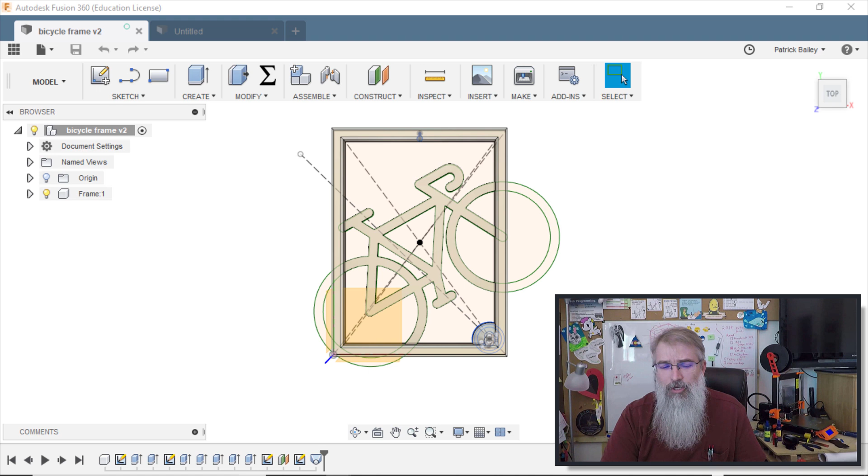So here is what I did with the bicycle. I'm not going to go too much in depth. I'm going to redesign it a little, and I'll probably post it on Thingiverse. But the flossing Fortnite dancer is probably a little more fun to do.

Here I'll go over the idea real quickly. I took the SVG file, imported it, turned it at an angle, and then built a frame around it, then extruded the whole thing. You can see where the bicycle happens to go over - I just didn't extrude that. And I extruded the bicycle just a little bit, though I don't know how well that shows up here.

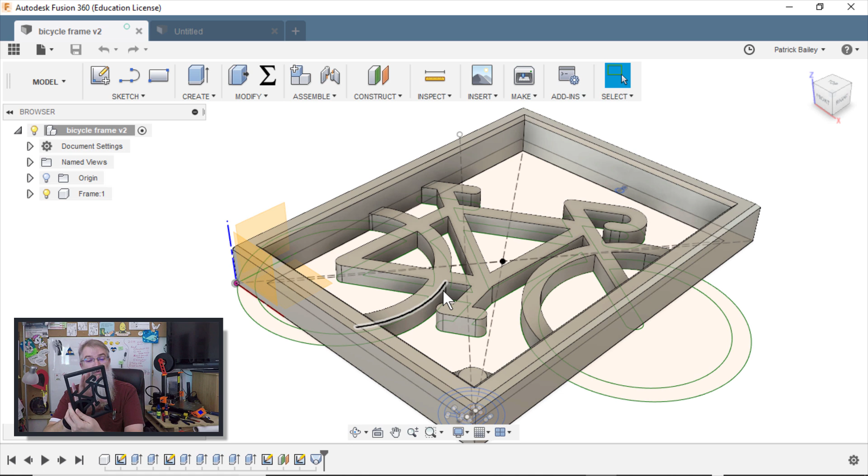I'll do a redesign of it, but it's a little snazzy. I'll probably put a few different versions out there, because maybe you want an empty one, or maybe you do want to fill that space, or fill it with different colors in the wheel or something. I've got some ideas.

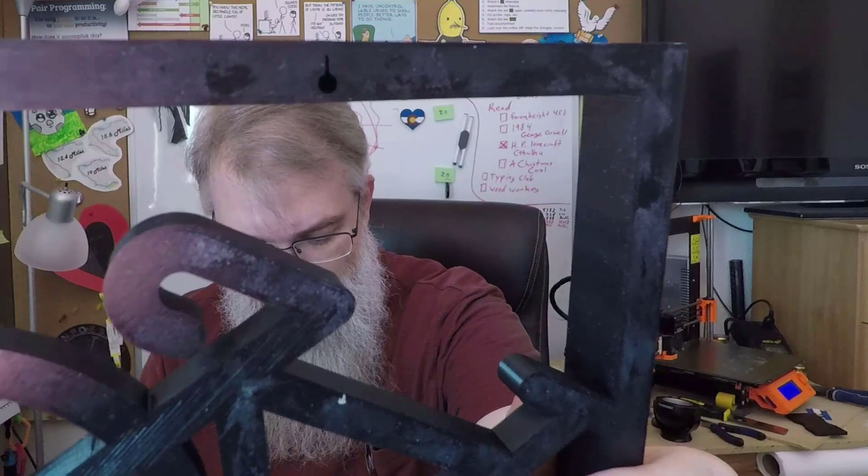But one thing that I didn't do too well on was the hanging. I don't know if it's going to show up well on the video, but I just put a little pinhole in there to put the nail on, and I don't think that's reality. So I've done a little redesign, and I've got this little sawtooth shape with a cavity in here that I did as a test. I'm going to try to do that in this video.

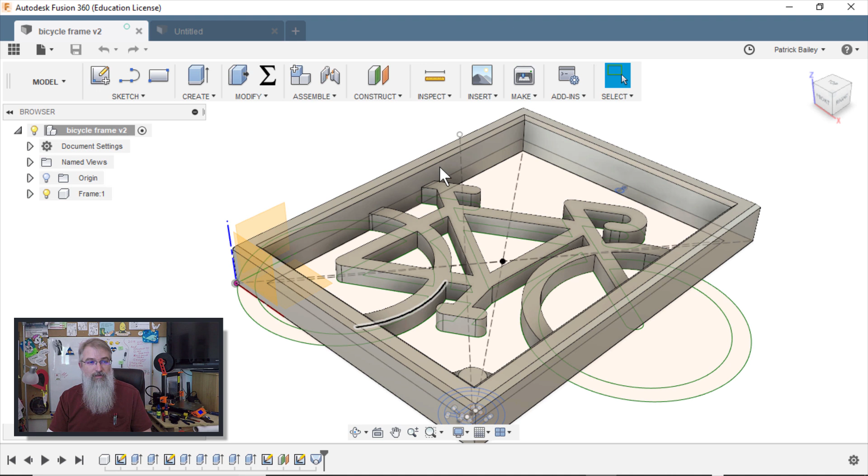But anyway, there's the bicycle. Now let me do the more fun one. I'll redesign this in a bit, but let me do the more fun one with the flossing, right?

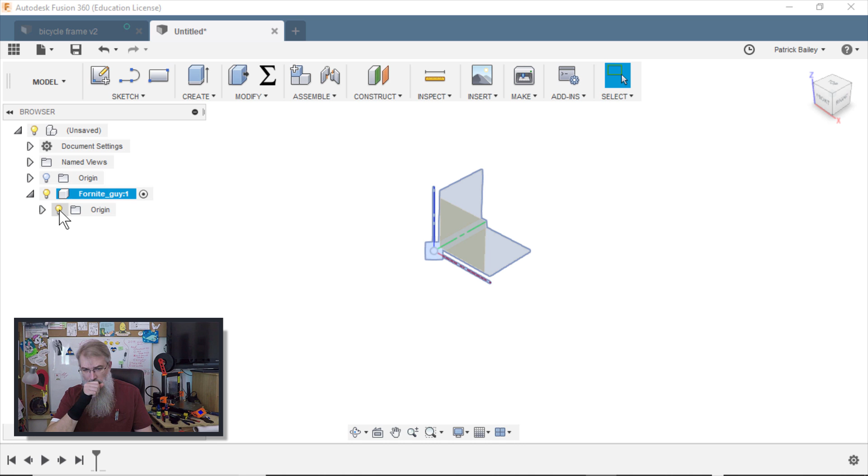So let me go here to a new file, and I'll say new component. Call this what - Fortnite Flosser, Fortnite guy. Call him Fortnite guy. Come down here. Show the origin. And I'll right click on here and say create a sketch.

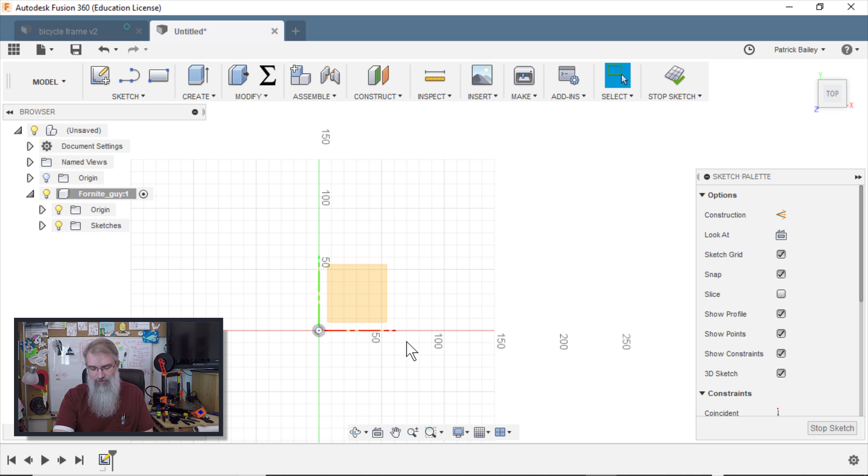So one thing before I bring in an SVG file is I kind of want to know how big I want to make it. So I measured my bed and I think I want to get them as big as I can - I think I might be able to go up to 230 millimeters. So I'll come down here, but I need a guide because when you bring it in, it gets a little inconvenient. So here I'll make a rectangle and I'll say 230 high - I don't know, 150 wide. I don't care really about the width. That's kind of my goal size.

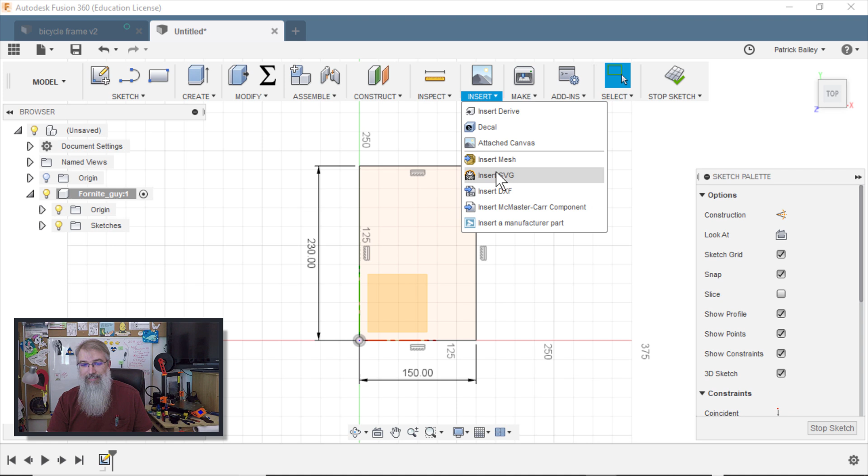Then here I'll go insert SVG, and I'll go find where the heck I put him. No, I didn't put him there. He is in testing, Fortnite. Oh, where'd you go? Are you on the desktop? Where'd I put him?

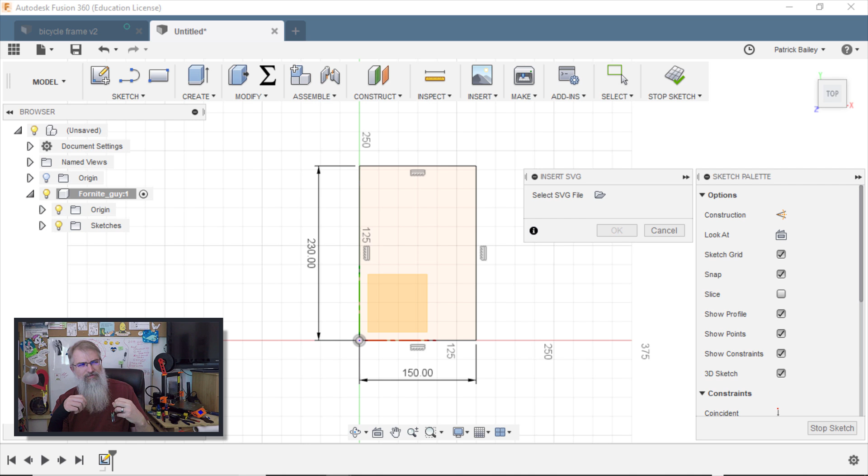Let me go find it because I won't go over this in detail. But when you download those files, chances are - I don't know if SVGs always have to be text or can they be compressed - but in this case, it was text, so I could actually go through the file and comment out some lines and delete the other dancer. So I got it down just to the dancer I wanted, just for convenience sake. I didn't have to do that because I could have brought it in and deleted him here, but I got it down to the one dancer.

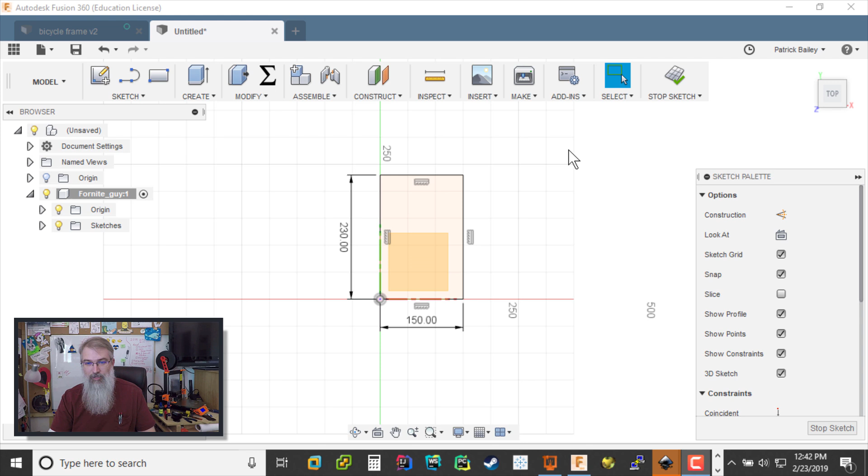So let me go find where I stuck that file. Okay, so I found him now. So let me go insert him - insert SVG. Now that I found the file, here's my fixed version, which only has the one guy. But again, you could bring the whole crew in if you did that and just delete the other ones. So that's pretty close to my maximum size.

Now I can click here and resize him. I'm gonna try to max it. Let me see if I can. I think I can probably even be a little over and be okay. Don't push it, right?

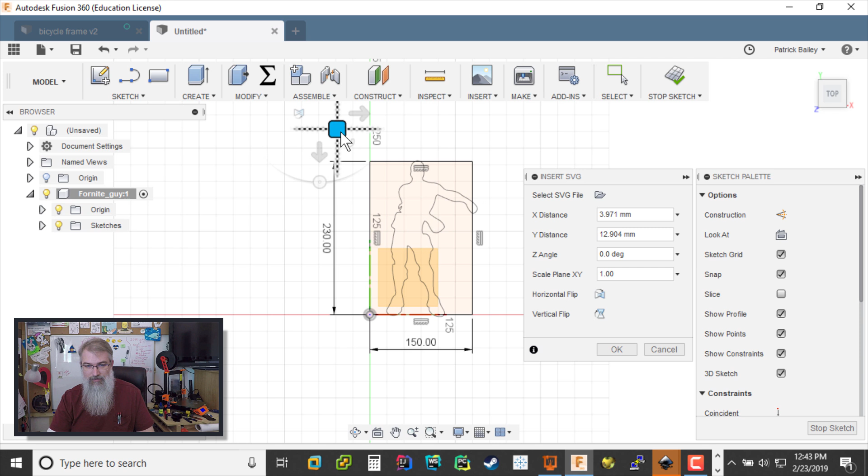Hit there, let's try that. Hit OK, and now that's there. So now I'm going to come back. I don't need these lines, they were just meant to guide me to set this up correctly and get this guy roughly the right size. I'll click on this, and it's just going to be a shadow, so it's going to be pretty simple. Let me back up.

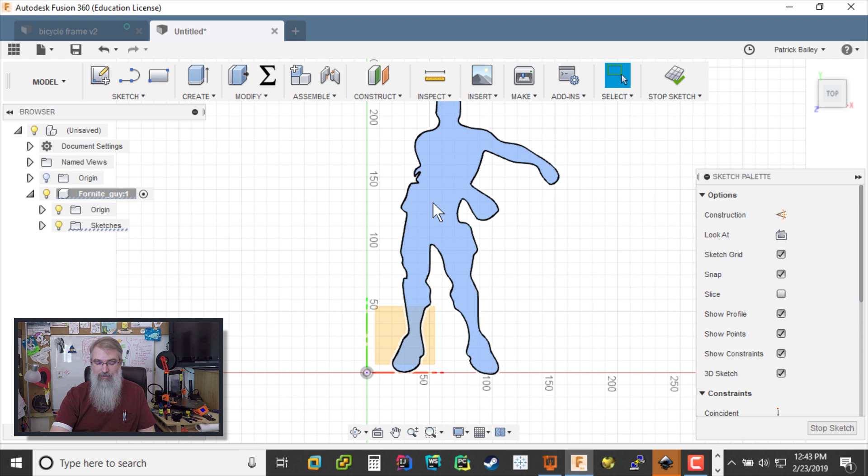Select this, press Q for my press pull tool, and I'll go up, try to go up 8, yeah, maybe 10 millimeters, because that's about right. Yeah, let's go up 10 millimeters.

Hit OK. Now the thing I got to do is I want to put this in the back, but I want to kind of center it as best I can according to the weight on this. Where's the center of mass? There's a cool tool in here. It's not going to be perfect. Well, it does do the calculation perfectly if this thing were to be solid, but it's not going to be solid, but it's going to be pretty close.

I can go up here to inspect and say center of mass. Select that, click this guy, hit OK, and it puts a little icon there showing you the center of mass of this guy. And so you see that? That is the center of the mass of this dancer because he's flossing over to the right.

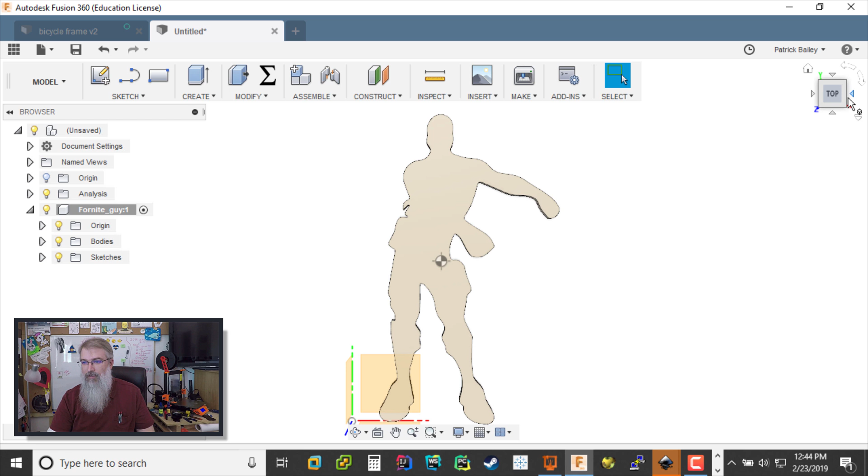So I'll go to the back, click on here and say create a sketch. Let me click on this - what are you doing? There you go, create sketch. So I'm going to create a sketch on the back to allow for my little teeth here.

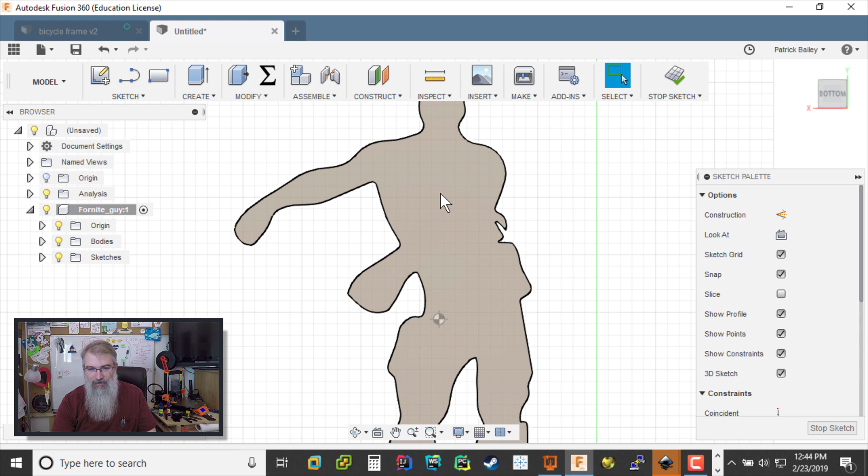So what I want to do is put this above the center of mass because I want it hanging down, but also I want to kind of make that center roughly where that center line is. So I'll come up here and say L, kind of zoom in. Again, it's not going to be perfect, so I don't need to be either. I'll come up straight, hit escape.

I'll make this a construction line, and go probably right about there in his chest is where I want to do it. I'll hit L and start drawing a line. I'll come out here - I designed this to be about 50 millimeters wide, so I'll go 25 that way. Did I do that 50? Okay, now that seems a little wide, huh? Yeah, I did 50. Well, 50 is going to be a little wide, ain't it?

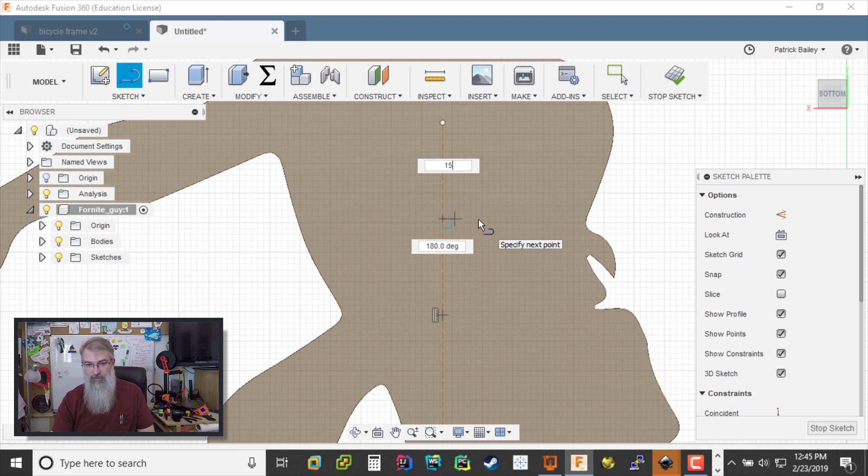So let me cut this down to 15. Yeah, I'll go 20 - no one's going to see it, right? So I'll do 20. Go over here on the other side and do 20.

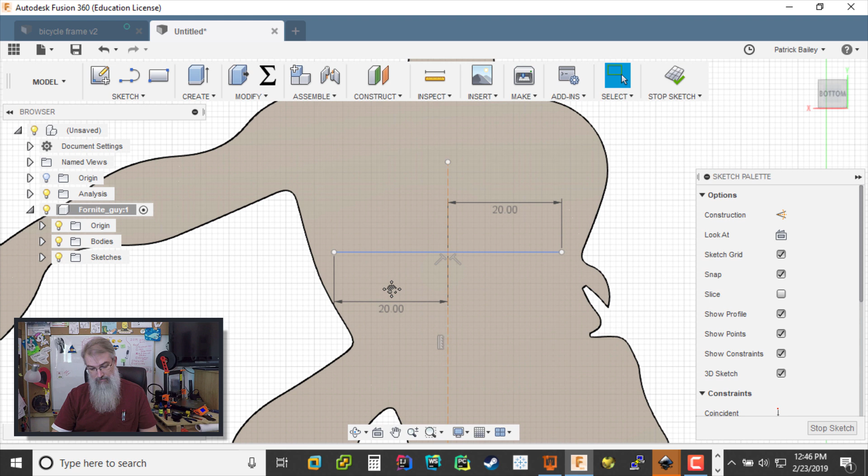And it looks like I could probably want to go up rather than down. And these guys are going to be about - do about 12. Hit here, go up about 12, and just kind of finish this off. Go up 12.

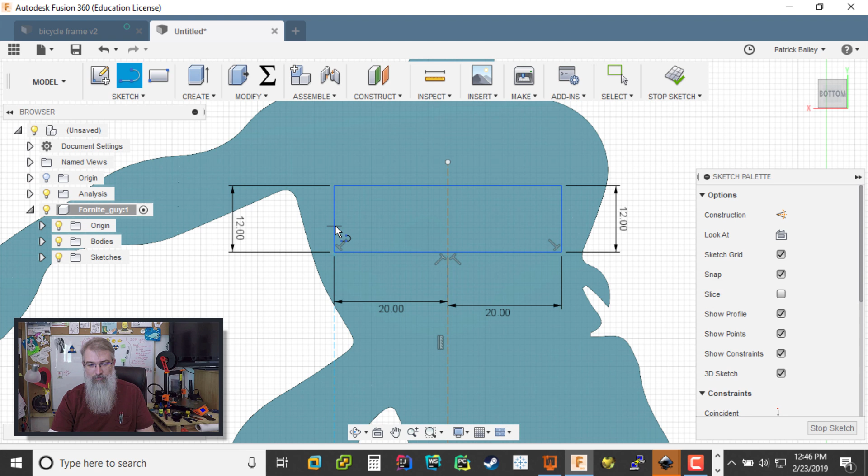There we go, a couple different ways to do this, right? And then I will - well, I got the center marked, that's good. I'll come down here where I want to put my teeth. I'll put a line right here, press D so I can set the dimensions here. And I want those to be about - what did I do? From top to bottom, they are about 7. So I'll say 7. It gives me a guideline to put my teeth in.

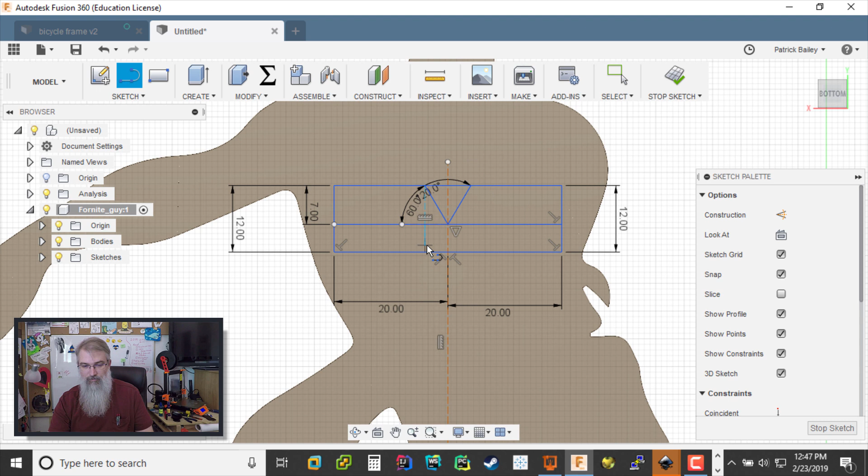Hit L for my line tool, come up here and do - so there's 90, so I'll set 90 plus 30, and tab. Come on, 90 plus 30, tab, until I get that to stick. Come back here, L, 90 minus 30. Boom, I get that. And then I can kind of continue on in that fashion.

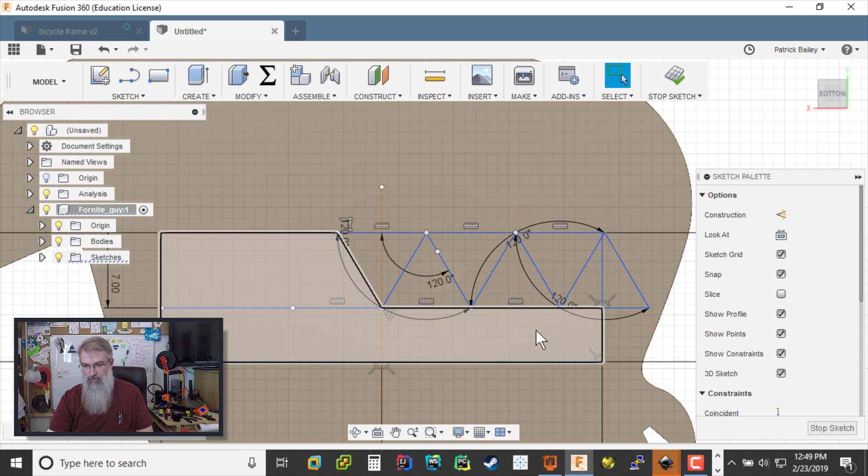So I'll say, let's see what's down - 90 plus 30. There we go. And then I'll hit S and find mirror, and I will select all these lines. Probably could have done a pattern on this, that might have been a better way to go. Select this line as my mirror. And there we go.

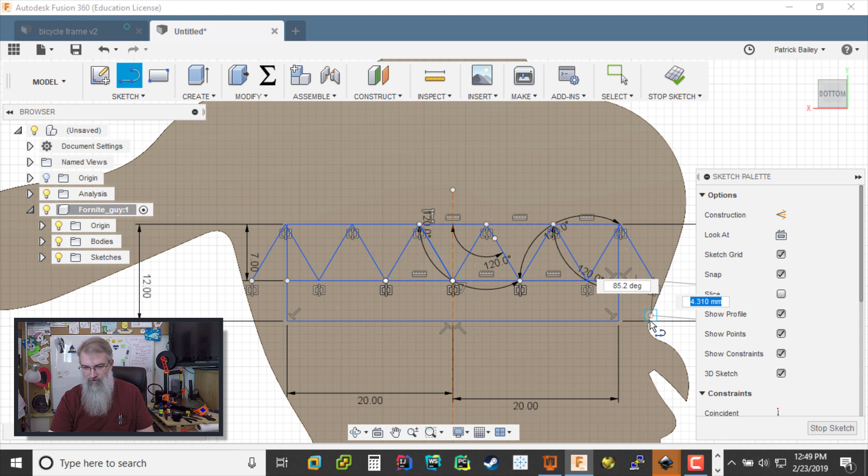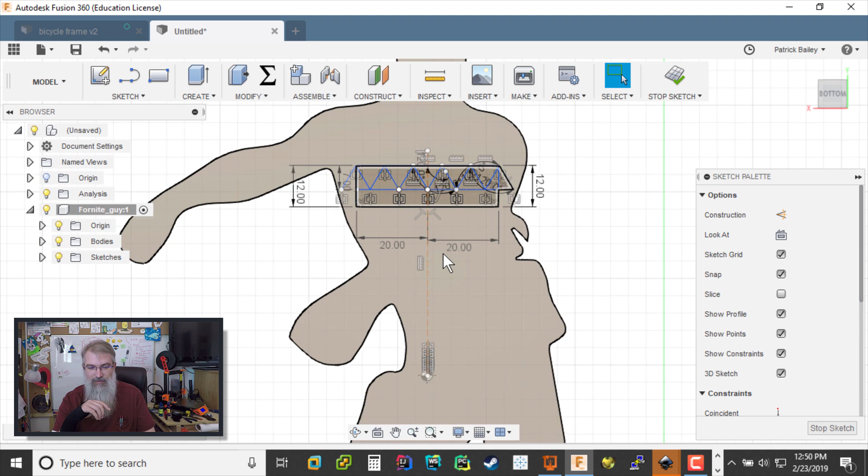But then I need to create a few more lines. Yeah, I don't like that, it's going to go outside. Ah, I just messed that whole thing up, didn't I? Okay, I need to start that over again, because see, that should be roughly the center of mass right there, right? And of course, I should have reversed this because that line is right there. That shouldn't be like that. So, what can I do?

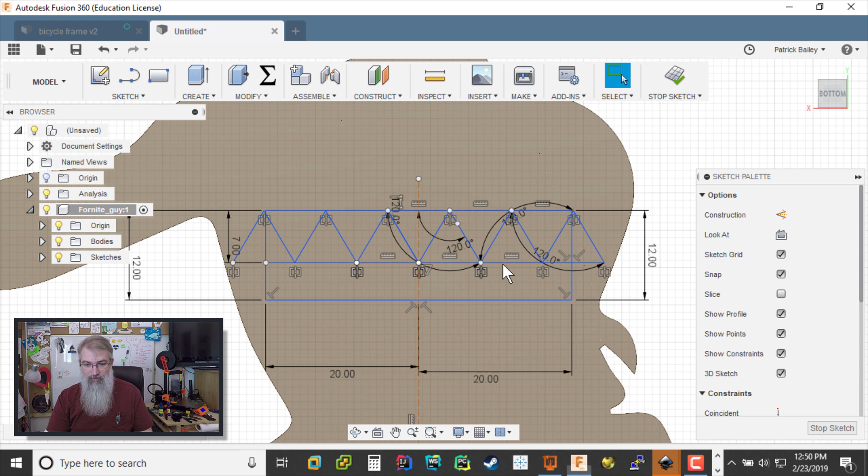Rather than redo that all, I can come back and say, I can mirror it. Let me try that - mirror. Let me choose all of these. Mirrored against this line. Hit OK. No, that's not going all the way down.

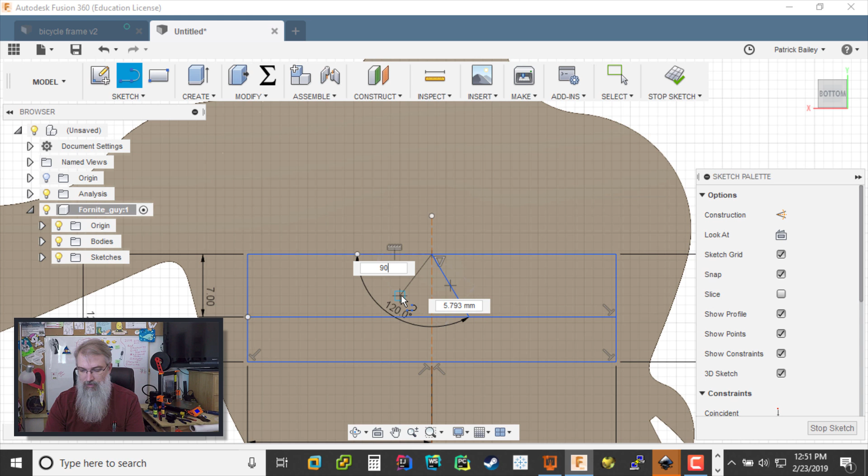Okay, let me restart that. Okay, restarting. Come over here, press the L tool, press that center, do 90 plus 30. Boom. Let me do the other side - 90 minus 30. And there we go. Let me get rid of these over-constraints that I don't need.

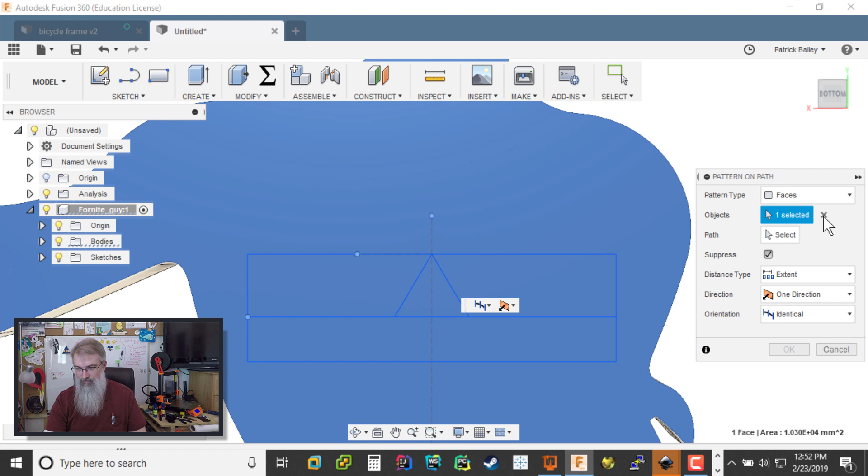And then maybe I can do a pattern. Let me try a pattern on path. So I would choose - oh, not faces. Wait, can I choose a face? No, not a face. Features. Components? No. No.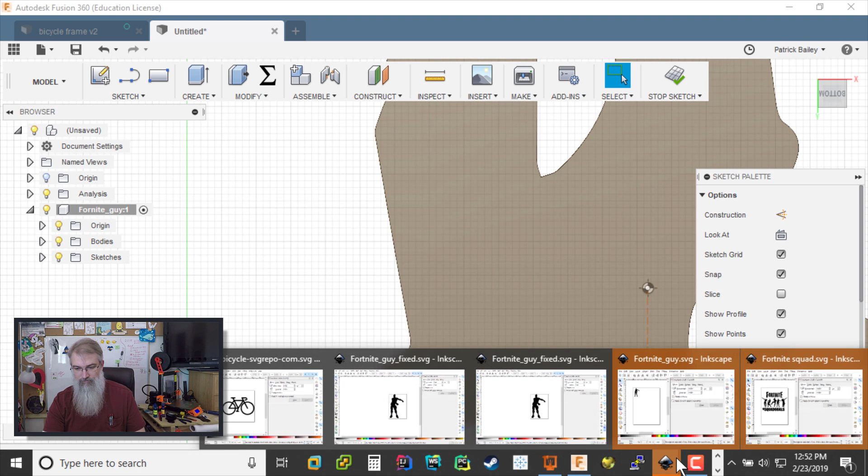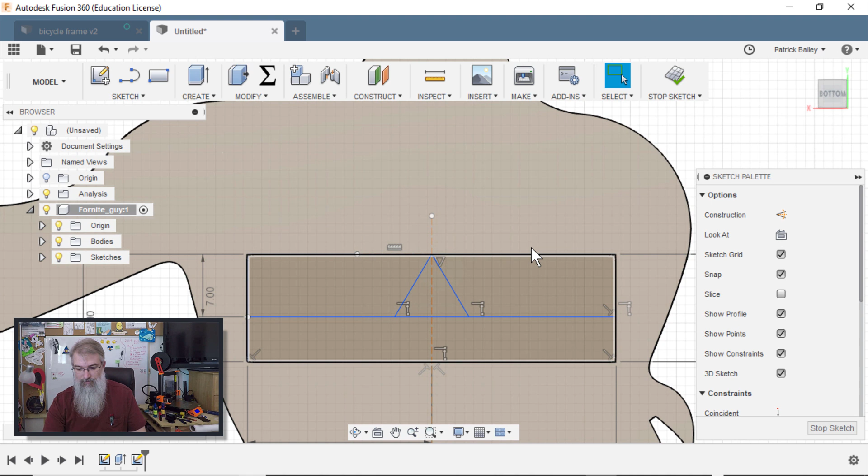Just gotta fight me, doesn't it? Okay, I'll do it the long-winded way. 90 plus 30.

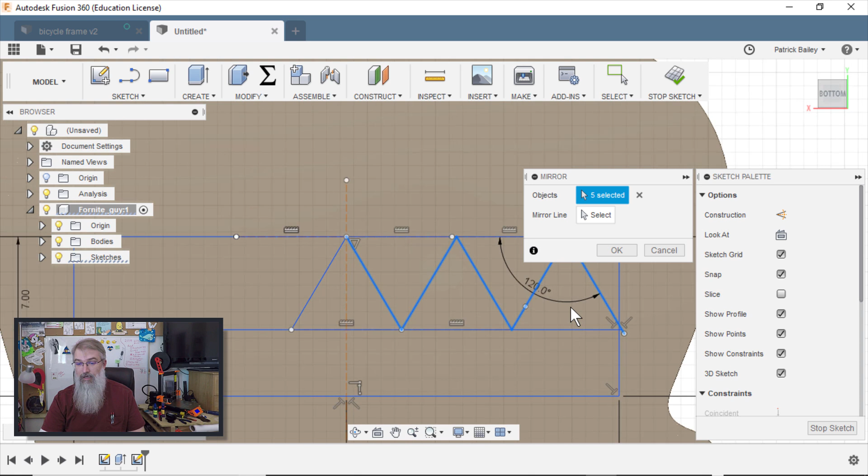So let me mirror this now. I'll select that, that, that, that, that, and this tiny little extra guy I made over here. Oh yeah, there we go. And then mirror it against the center. And boom. And then make this one.

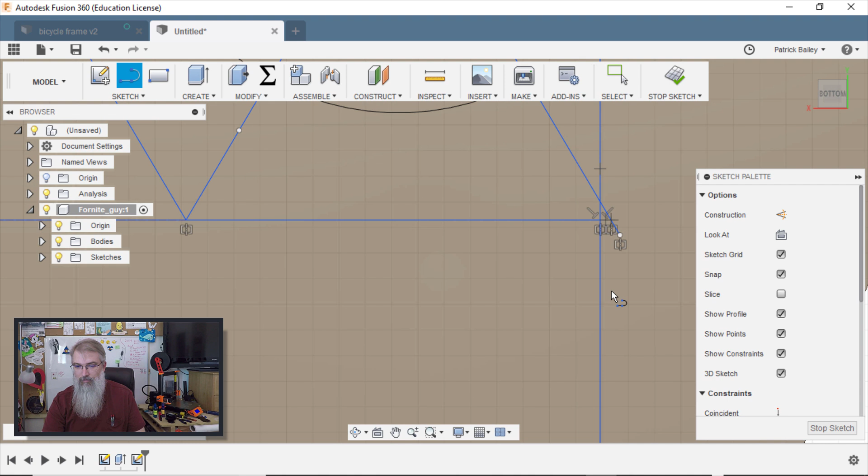Oh, it's not going to catch that, is it? And let me go L. Make a line extension here. There.

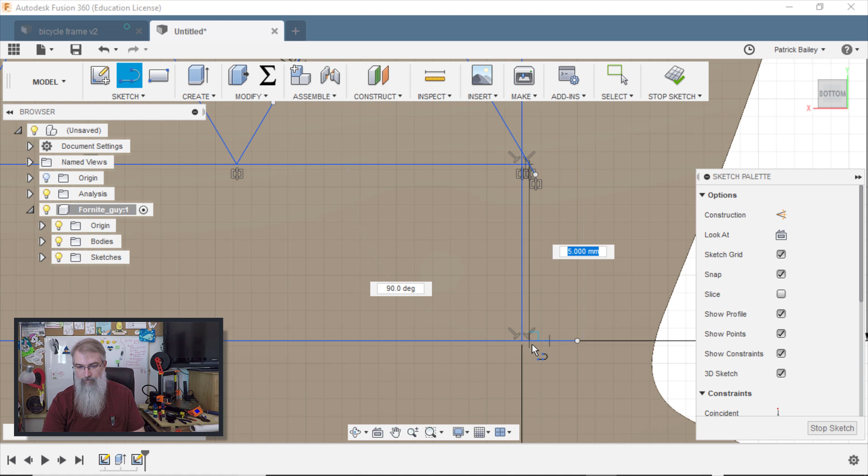Fix this. And make that one. I think I got that one straight. Let me see. Yeah, it's 90 degrees.

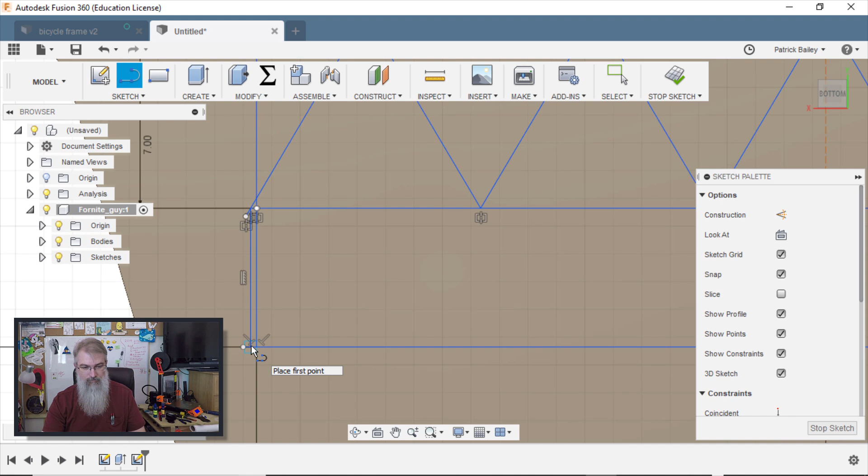Okay, I'll make that a construction line now. Make that one a construction line. Make that a construction line. Ugh, boy, that's a pain in the butt.

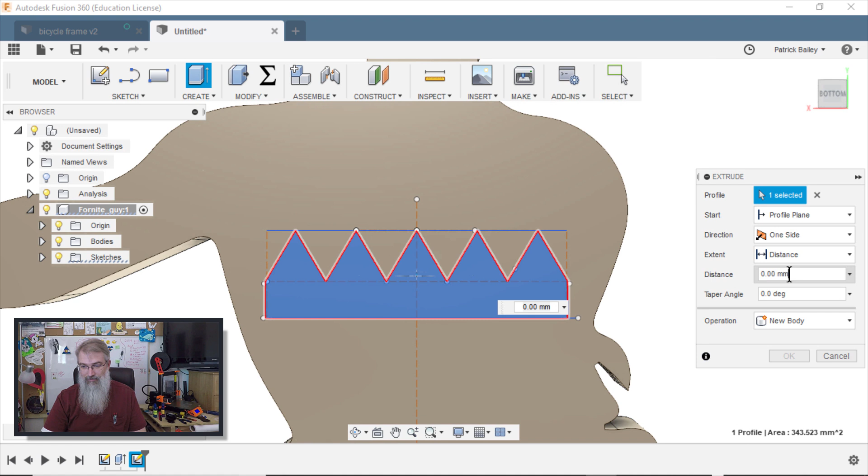Okay, so now I've got that. So I need to cut that in a little bit. So I will do a Q press pull, and I'll go in, let's see, -3 millimeters. Let me see if that looks correct. Yep, so we got that part.

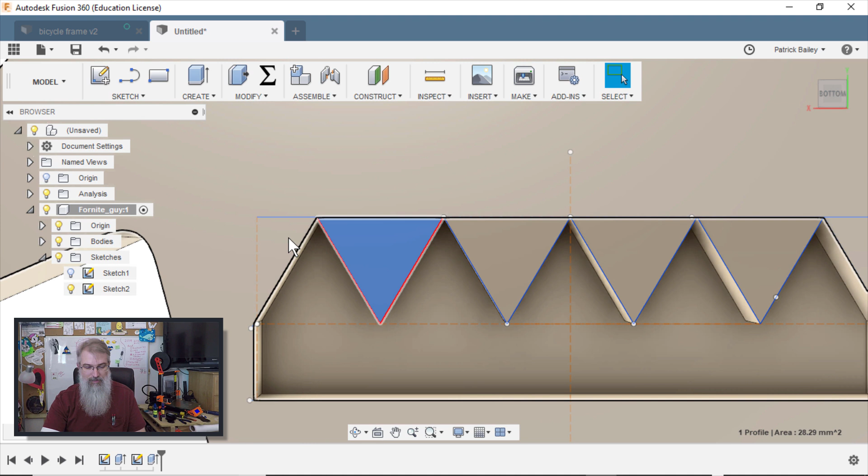Then, beyond that, it needs to be a gap, otherwise that nail can't get beyond that. So now I'll choose everything. Oh, now I need that line. Let me see. Oop, I need to draw some more lines, don't I?

Add a sketch. So I need that to go all the way up to here.

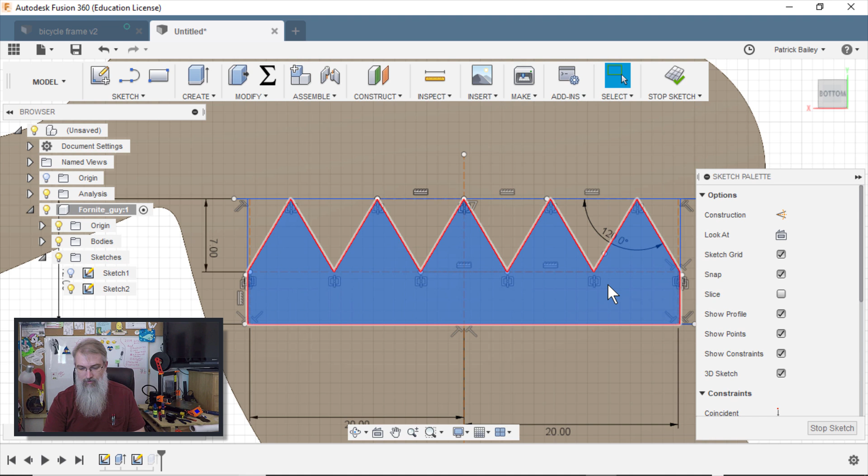There we go. There we go. So select all of this now. Oop, let me stop the sketch. And then come choose all of this. Press Q for my press pull tool.

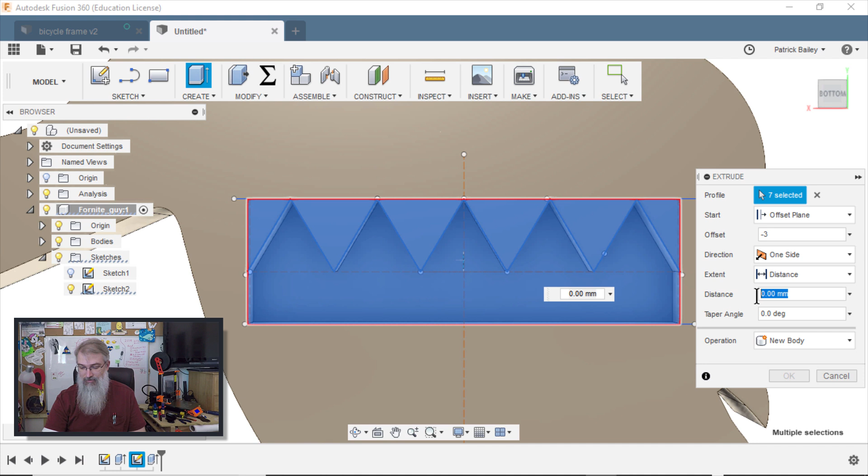And I first want to offset at those 3 millimeters. So I'll say offset plane, -3. And I'll say, at least 3, right? So I'll say 3 more. And hit OK.

And what did I just do to myself? And you wiped everything out. Okay.

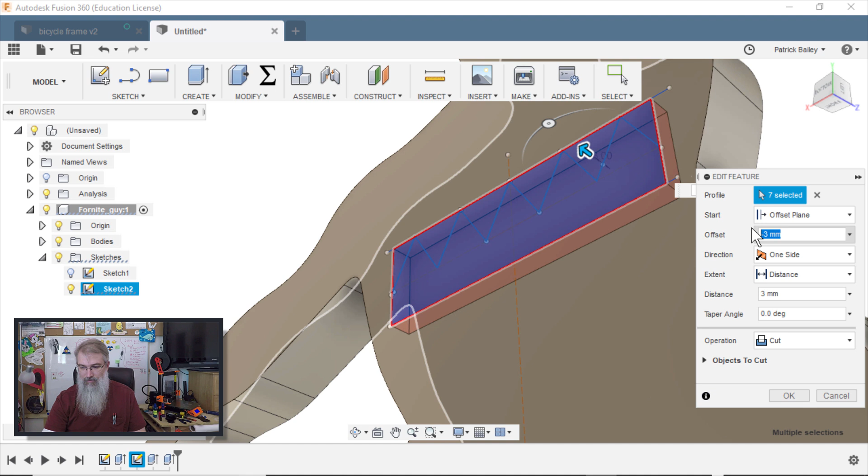Oh, I went forward 3. Okay, yeah, offset plane, -3. Distance, -3. There we go. Boom, there we go. So now it's got a little place in there for the nail to bite.

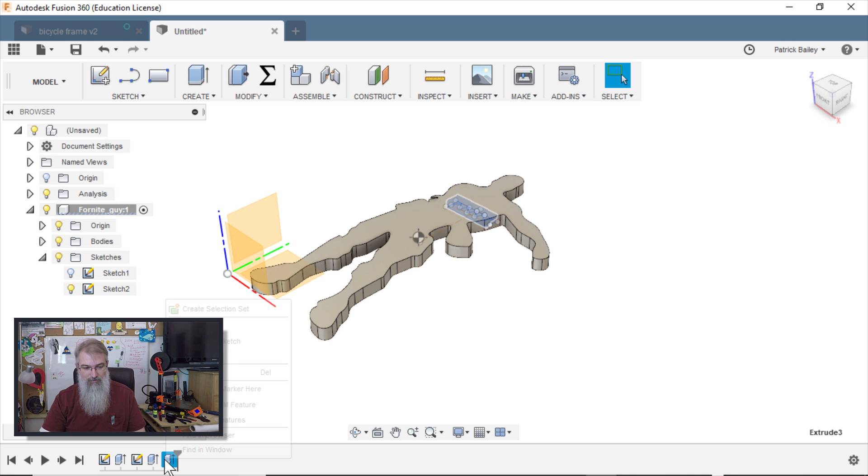And so the whole thing was 10 millimeters, so tip 6. I could go a little further, right? Let me edit that. So rather than being a total of 6, I could go 2 more, about -5. And then from over here, so basically, I'm done with this now.

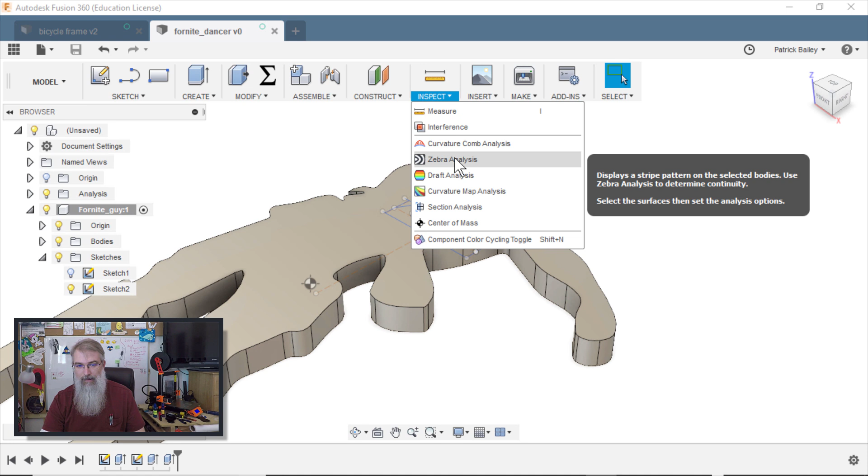But let me inspect it. Oh, let me save it. Fortnite Dancer. I'll say inspect, section analysis. I'll just choose something on the side here.

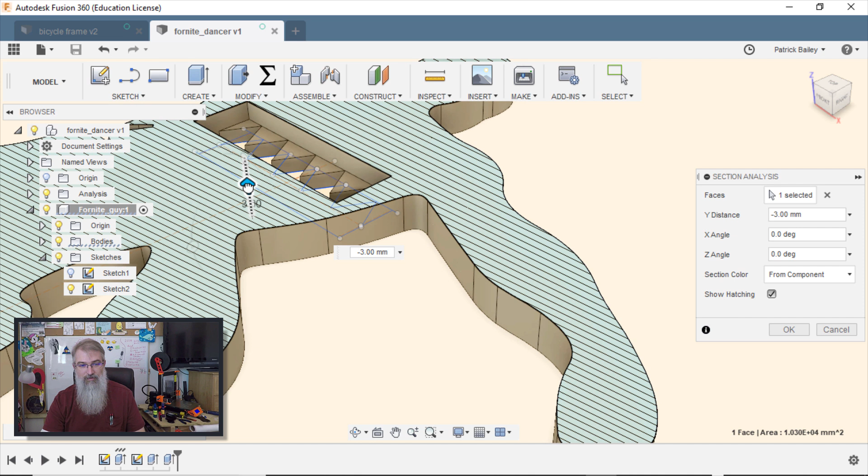Yeah, you're not just choosing the side, are you? There we go. Inspect, section analysis. Now you're going to do from the top. Okay, that's fine. I'll go down, down, down, down. There you go, there's my cavity.

It's going to be covered up, enough for a nail. And then boom. Cool, so hit cancel. I think he's done.

So let me save him again. Right click on here and say save as STL. Hit OK. And this is technically my second attempt at making him, so we'll say attempt 02 and call it Fortnite guy.

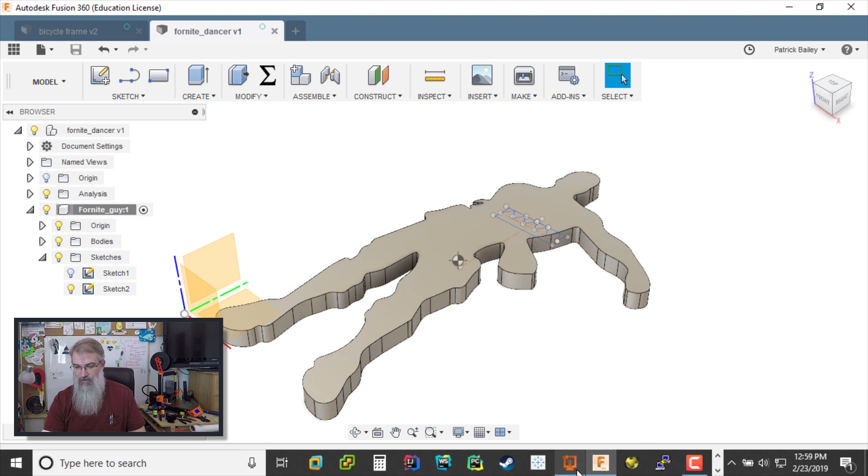And let's bring him up in the PrusaControl. So there he is, attempt 2, Fortnite guy, and hopefully he's bigger. Cool, I think I might have got the right size.

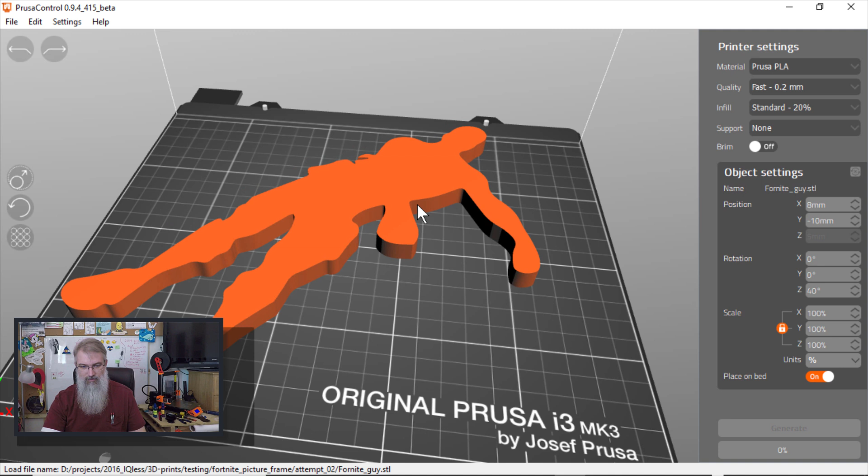I can rotate him. So let me rotate him, I don't know, 50 degrees? Oop, too much, 45, 40. Let's see what kind of damage I can do. And how about negative 45? Eh, 52, there we go.

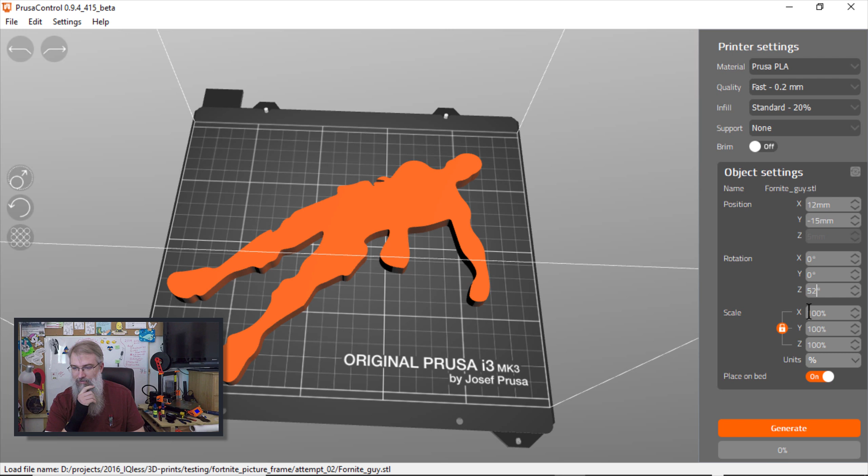Ah, look at that, plenty of room. I can even make him bigger. I want to try to maximize him. So let me say 110. I don't want to try to push it too far.

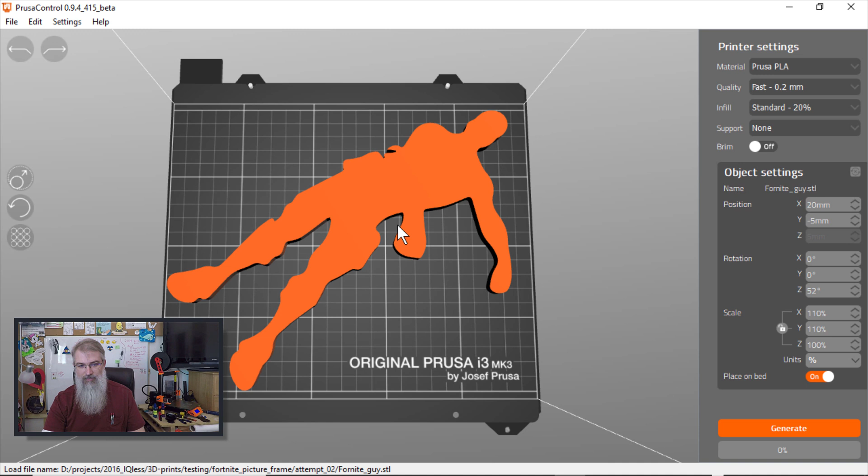Oh, but let me scale. Let me unlock that because I don't really want to scale him up. So let me change the Z back to 100%. And so he'll only be 10 millimeters high. Yeah, that's about as big as I can make him without pushing it.

So let me see. He doesn't need a thick infill. He's not going to be very strong. So I'll just make him sparse. Don't need any extra. And usually I'm doing 20%, but in this case,

well, he's going to be kind of long and gangly. Okay, I'll just leave it normal. I'll leave it like normally do. 20%, 0.2 millimeters, hit generate. And we'll see what it looks like here.

There we are. Let me make sure we're not pushing it too much with those. Okay, we're good.

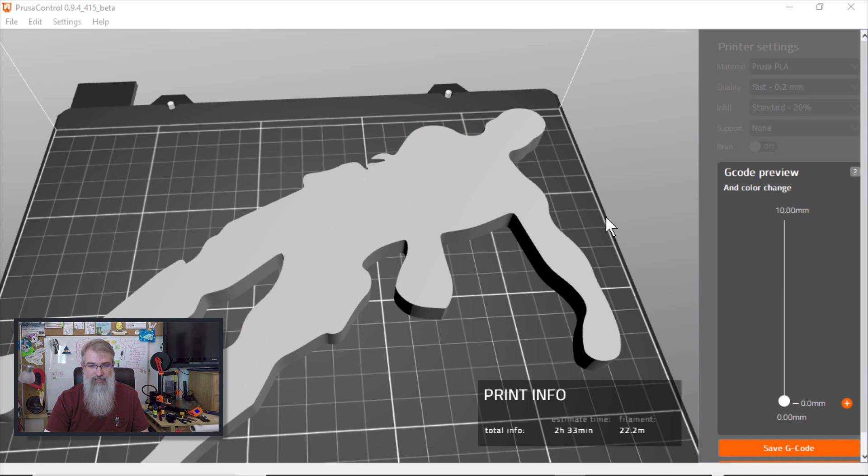Okay, let's save the G code and go print this guy. Boom. Let's go see how long it takes.

I'm not going to probably videotape it, but I will redesign this guy a little bit and put him on Thingiverse, and I'll also show that in this.

Okay, so I got both of these guys printed. I got the little Fortnite dancer all printed out, and he has little holes in the back, a little sawtooth hanger on the back.

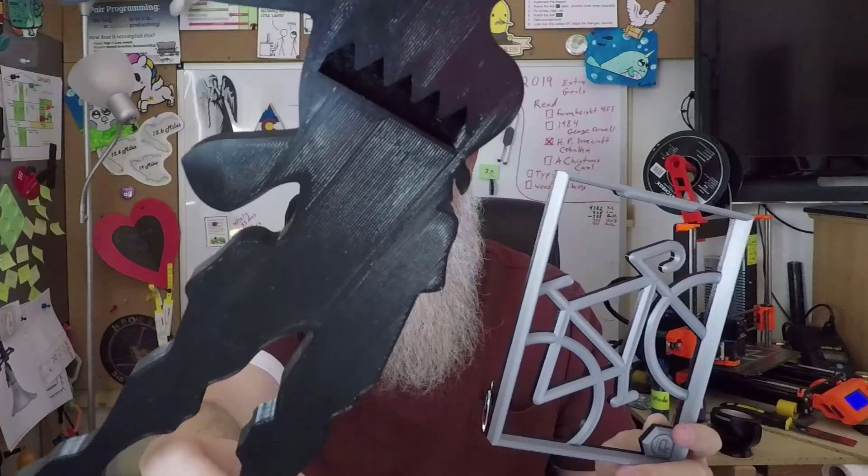I also had to redesign the sawtooth on this. Had a little bit of an issue. I don't even need to go over it. I fixed it, not a problem.

But before I go over the numbers on these, I did want to show a little bit of the fixing on the sawtooth. I think for this the sawtooth happens to work. Center of gravity, it kind of worked just fine. But I think there could be an issue. I think I made my sawtooth too big, so I want to go over that.

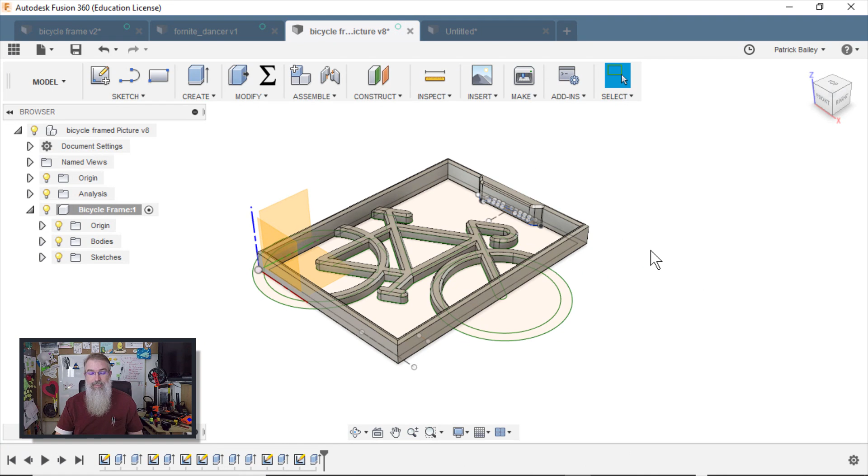So here in Fusion 360 is my bicycle that I made. And if I go edit on this, there's my sawtooth. So I made my sawtooth a lot smaller here.

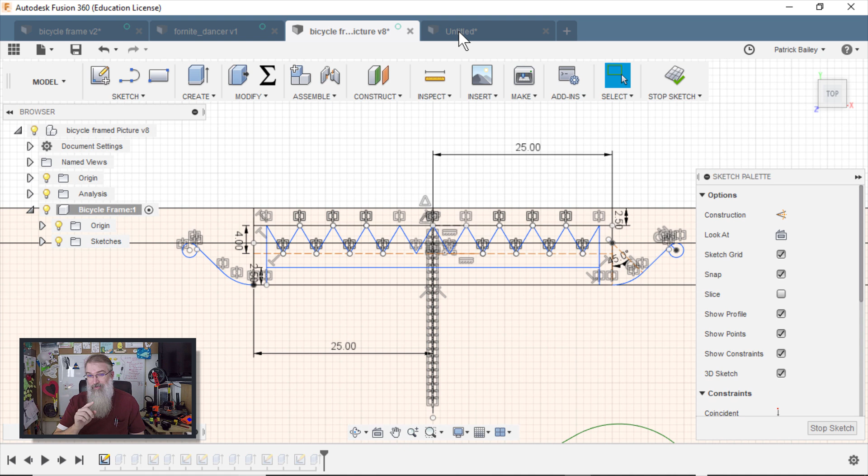So there you can see, if you look at that number, that's 4 millimeters in height. And I'm still trying to get that 60-degree angle. But I figured out how to do the pattern on the path, a much easier way to do it, so I wanted to show that rather than wasting your time trying to go up and down like I did at first.

So here I'll go create a sketch here, and I'll make a rectangle. I'll make it 4 by 50.

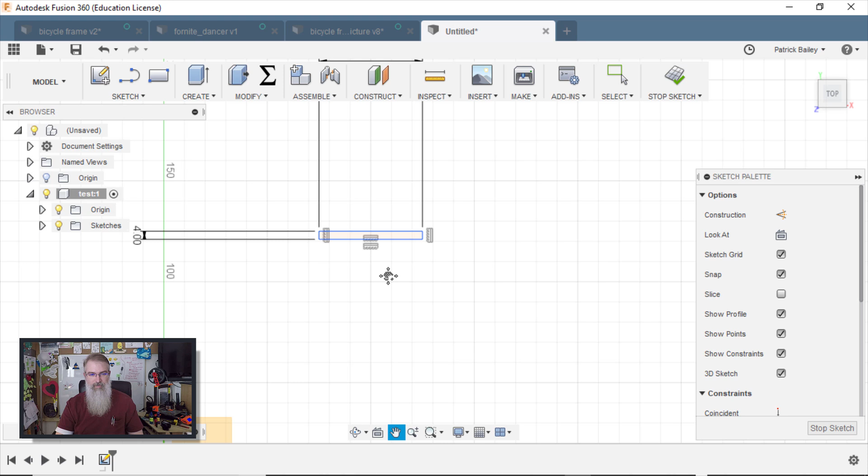Let me zoom in here, and I'll choose the center line here. I'll click on here, which that little triangle there means center line. Oh, not there. Okay, center line to center line to use as a guide. And I'll make that a construction line.

And so now from here, I want that to go up there on that center line. Now, this is where it gets a little tricky, because you can do a pattern, but you want the pattern points to match up perfectly. If you don't do that perfectly, they're going to be a little off. You could do the math and get this set up just right, angle it and get even numbers, but I think that's going to be a pain in the butt, so I'll show you what I'm going to do.

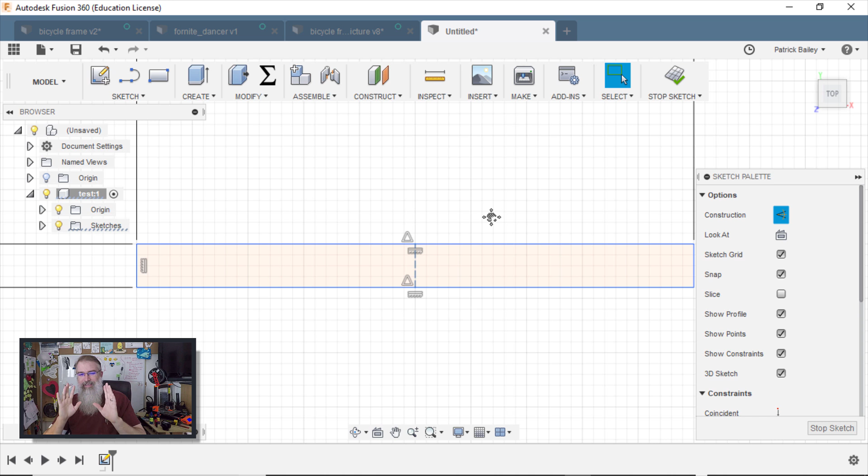So I'm going to hit L, start a line, come down here, do the 60 degrees, and lock that in. Come down here, and I got that, right? Then I'll just delete that. And then my next line here, I'll do 60 degrees. This one I'm actually going to delete in a second here. So that's the pattern I kind of want to repeat.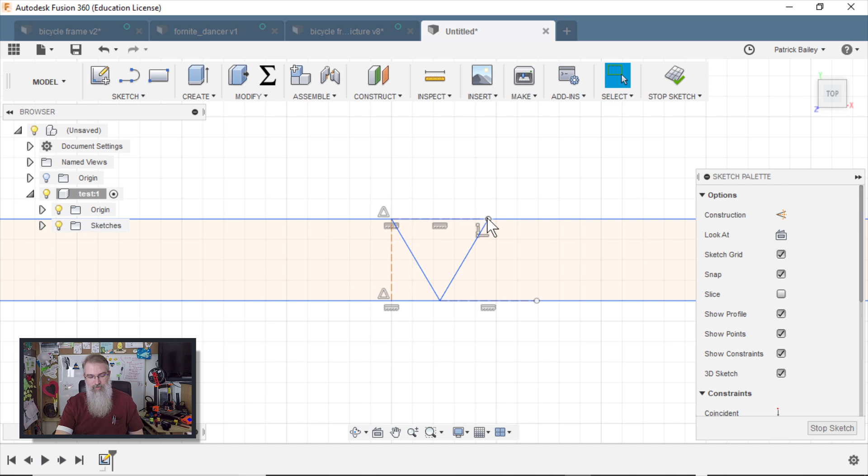But like I said, unless you do a little bit of math, the distance between here and here is typically not going to be an even number. So I'll press the D key for checking the distance here, setting the distance. And here I see 4.6188. So I'm going to go over here and just write that down, 4.618, just so I remember it.

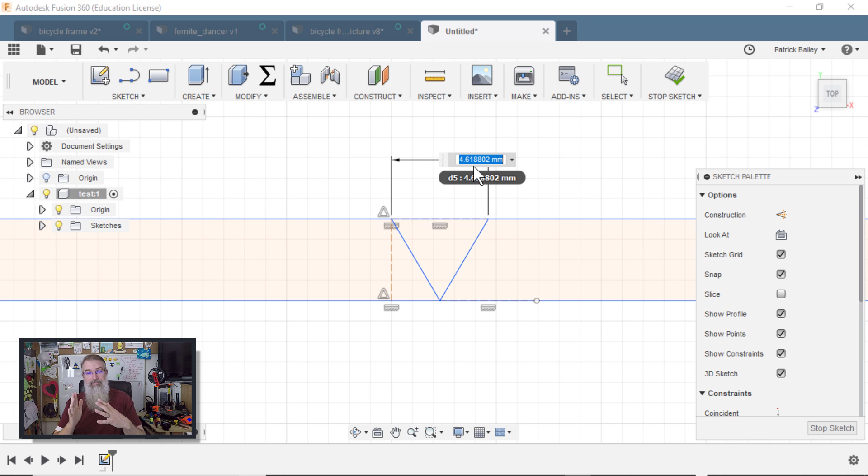Because even if I do a pattern on a path and multiply this by 4.618802, that doesn't mean they're all going to line up perfectly. You might have some issues. So what I'm going to do is just remember that number, and I'll delete that. I'm going to wipe that guy out, hit my S key, and search for pattern.

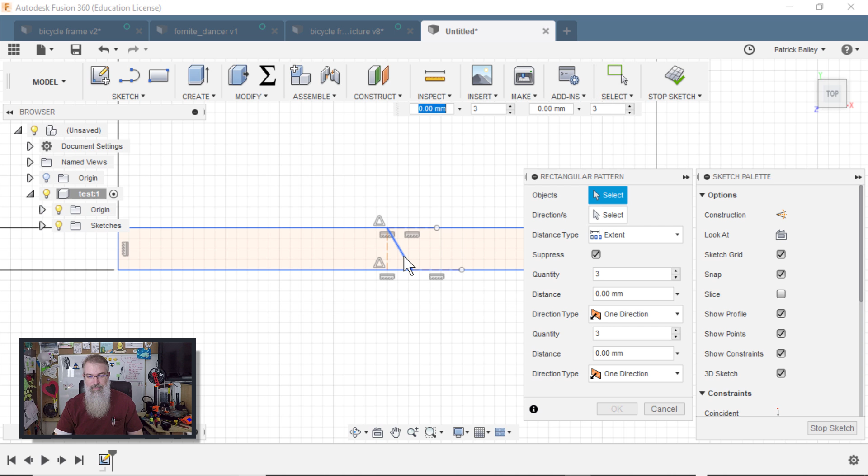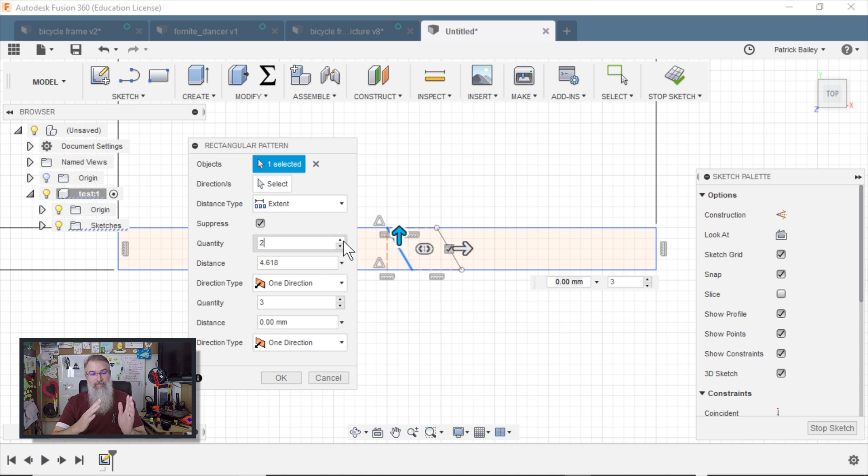See, I'll do a rectangular pattern. This is where I was getting a little messed up before. I'll select my line. First I'm going to make a pattern just for that one angle, not the other one. I want that to be a distance of 4.618, the number we just figured out. And if I do a quantity of 2, you can see that lines up with pretty much how we want it to be. Now this angle will be perfectly 60 degrees like we want, so that gets us what we want on that side.

Let me get how many we want here, 2, 3, 4. Now here I can do math: 4.618 times, quantity of 5, so 5 minus 1 is 4, and boom, there we go. I could do another one if I wanted to get to the end, but that's crossing over the end, so I'll just come back 1. So I'll say 4. Boom, so those are all kind of where I would actually want them to be.

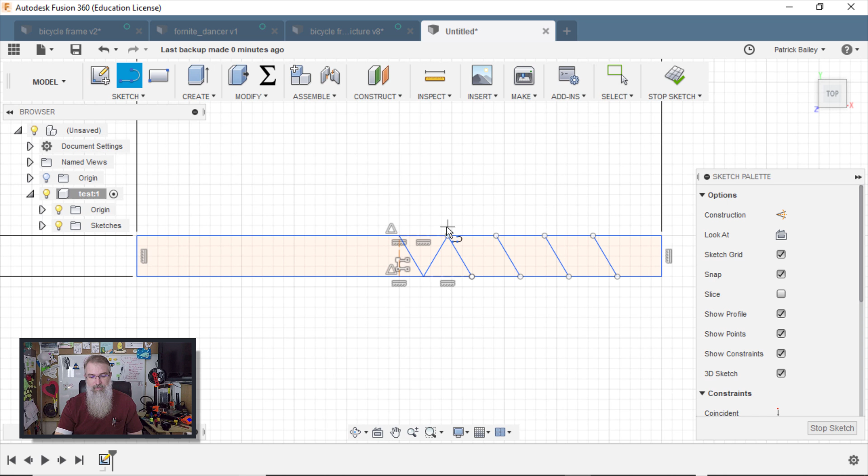Now I'll come down here and make a line here to here, which it says is 60 degrees, so maybe I lucked out. Click on there, hit escape, hit the S key, hit escape, hit the S key, do the pattern on the path again for this guy.

Rectangular pattern, click on this one, go 5, just repeat what we did before, 4.618 times 4. And then I know they're precisely lining up, there's no question about it. See, I can go select these just fine, I'm getting exactly what I want.

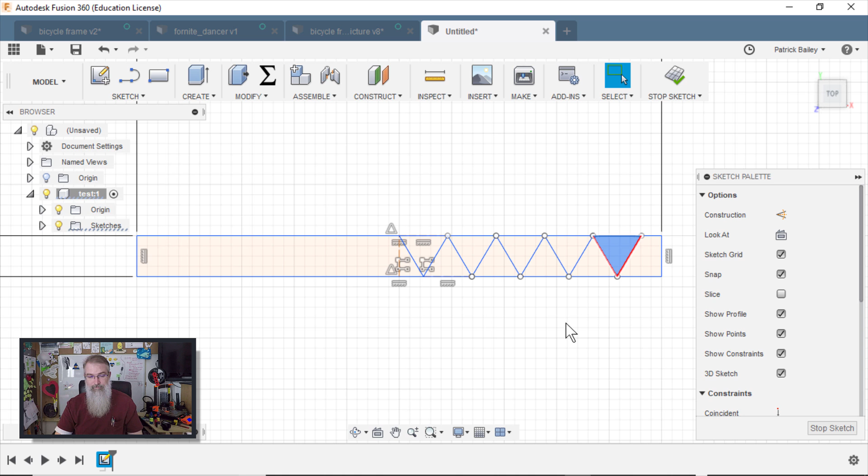Maybe I'll make another line down here. Line down here, line down here. I'll make that a construction line. Okay, now mirror the other side.

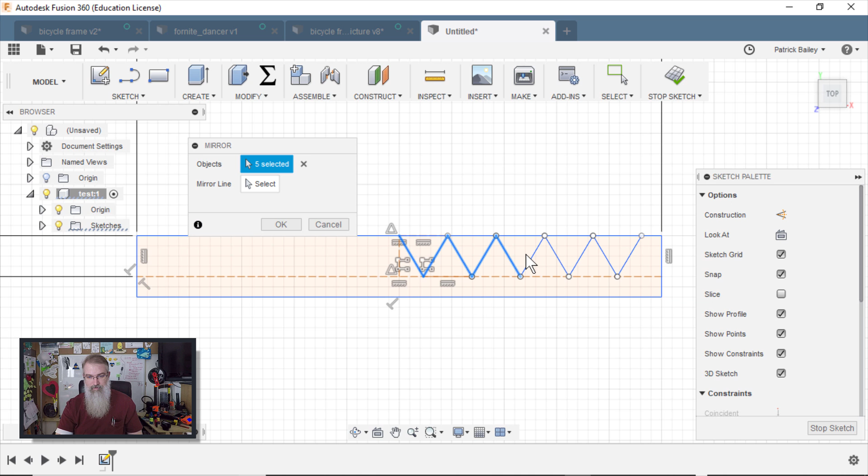Select, well I already have it up, mirror. I'll select all these lines, and I'll select this midline here, and there we go, boom. Then I come over here, hit that, go down, hit that, go down, and there we go.

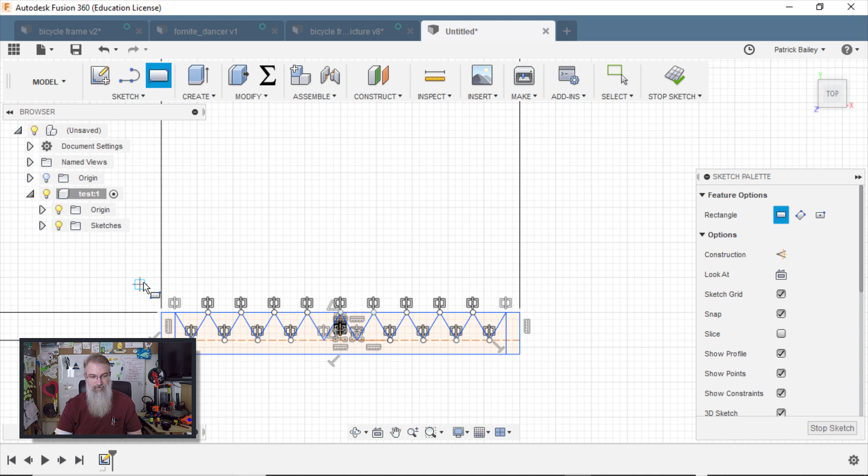So let me do R and do another bigger rectangle around this whole thing to simulate the frame. And now let me just extrude it to show you what I did. I'll go select everything here, do a press pull, go up 5 millimeters, let's go up 10. Go up 10, and I'll go on the back side here.

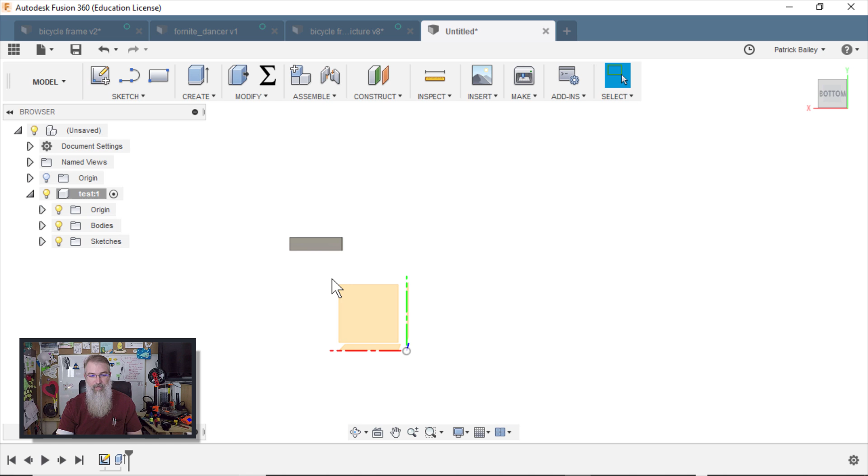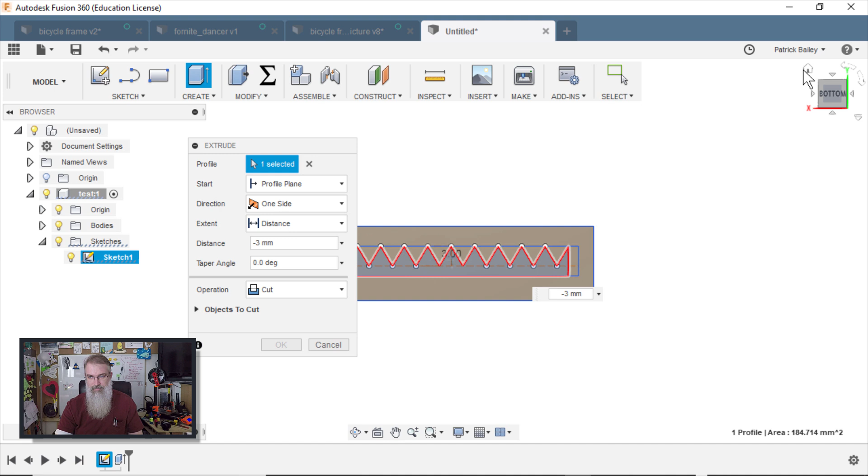Because now that I have that, I'd want to remove the void, right? Let me bring back my sketch. Now I want to take this part and go back probably 3 millimeters, that's what I've been doing. Press pull, say -3, and don't do a join, do a cut. Make sure it's doing what I want it to. Oh, it's going the other way, that's why. So I do a 3 in this case.

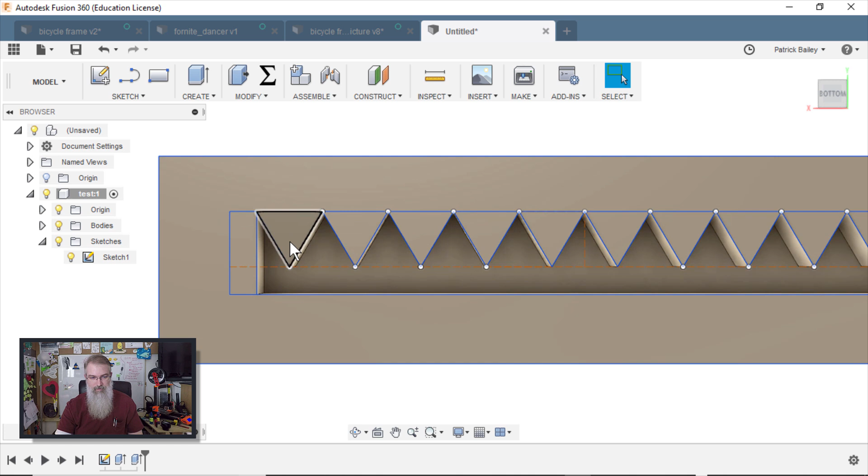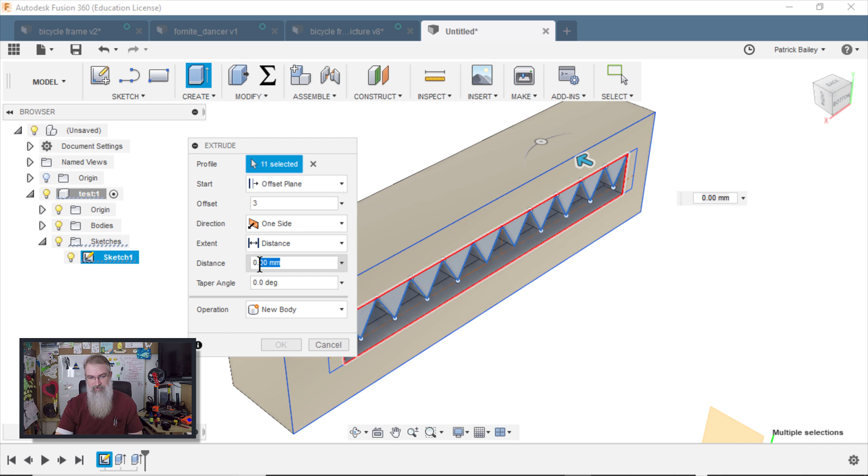There we go, got our cut, hit OK. And the last step, come back here and select that, and then select all these guys. Hit Q, and I want to do an offset plane because I want those teeth to stay there. So I'll say an offset plane of 3, and I want this to be, let's just say 4 millimeters deep, or maybe just 3. And hit cut, hit OK. And that should do it. So now if I do inspect section analysis, choose that, hit OK.

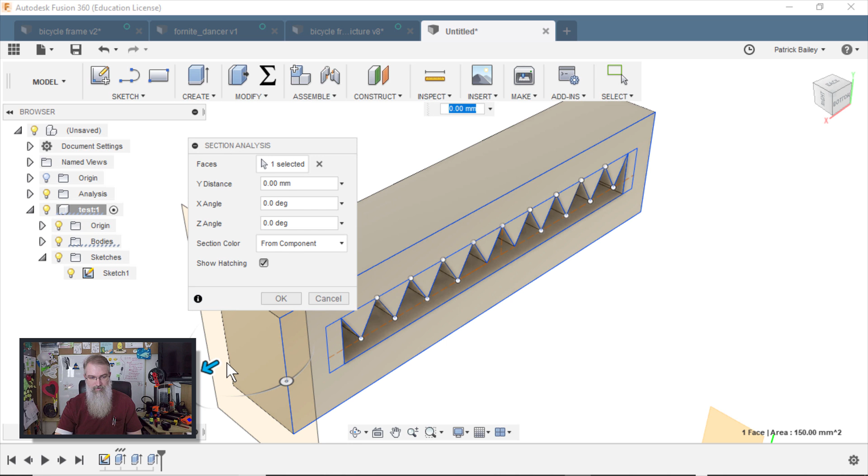Inspect section analysis. There we go, now you can see I can go through it. I've got that cavity back there, so the heads of the nails should stick through just fine. So that's what I did, and that's probably what I should have done on the Fortnite guy. Well, two things: that's the better way to do this, to do it quicker and more precisely. But also, I think I made these teeth too big, so they're too far separated, so if I have to go over one notch, it might be a little off kilter. Where this one, I don't know how well it shows up, there's a lot more tiny teeth.

So I'm finishing the redesign for this, I'm actually printing it right now. And once I get that printed, if it looks nice, I'll put that on Thingiverse, and I'll put a link here to where that is on Thingiverse for people who might want it as an example, or if you really think it looks cool.

I think it kind of looks cool. But anyway, let me go over the numbers. These numbers will be for this guy, which should be close to what this is going to be, plus or minus maybe 5 or 10%, so close enough for government work, right?

First of all, the Fortnite guy took 3 hours and 6 minutes to print. It took 0.027 dollars worth of electricity, and he weighs 0.06 kilograms, and at $20 per kilogram, that comes to $1.20 in filament. So total cost to print this is $1.23, not bad at all.

Now for the bicycle, this is a little bit more, it's kind of tall, and a lot more going on there. This took 7 hours and 24 minutes to print. It took 0.062 dollars worth of electricity, and it weighs 0.088 kilograms, at $20 per kilogram that comes to $1.76 in filament. So total cost on this is $1.83, which is not bad for a little thing you want to hang on your wall. I'm sure there's a lot of other cool SVGs you can come up with.